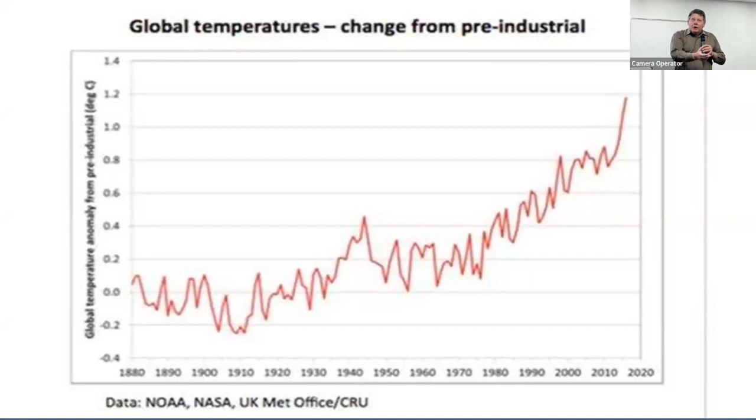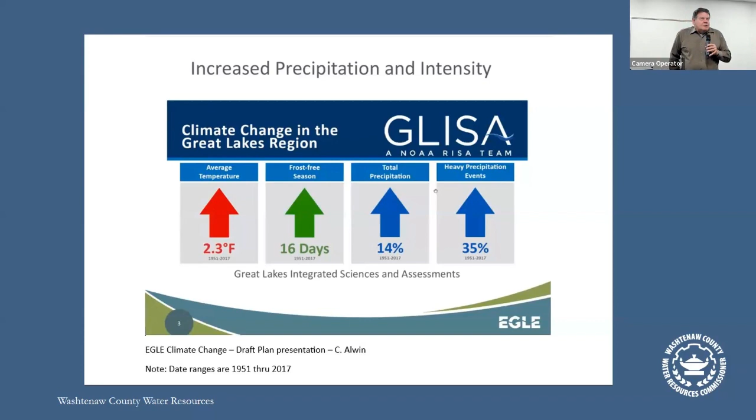So Jim, you can just keep it rolling. So the Great Lakes is studied a lot. For climate change in the Great Lakes region, there's a 4-college group that looks and studies and does forecasting on this. So again, 35% more rain in the period from '51 to 2017 in bigger storms. So anything that got stuck in the ground 30 years ago, 40 years ago, 60 years ago is under-designed at this point. That's not what things are designed for today.

So I'm going to talk about our strategy of dealing with more rain. We dig big holes, we dig site-specific holes, and we have a lot of people who help us out with green infrastructure. Those are very small holes.

So go ahead. On the regional storage side of things, in 1968, there was a very big flood in Ann Arbor. A cell parked around this area in Livingston for a good week. It rained really hard. There was a lot of flooding in 1968. Two dams were knocked out, Argo and Superior. Two other dams that the City of Ann Arbor owns were damaged. Lots of problems in the area. Lots of studies resulted in many.

So our goal is to store water during storms. It's raining harder and harder. It hits the neighborhoods. We want to capture that water before it gets to the bottom of the hill, because people at the bottom of the hill are going to be negatively impacted, as we've seen lately. You can go ahead and advance it.

So here's one example of a regional storm basin back behind the High Cone area. There's a large area called Doyle Park or Mary Beth Doyle Park. My office owns the land, and we lease it to the city for $1 a year or something like that for a nice big park.

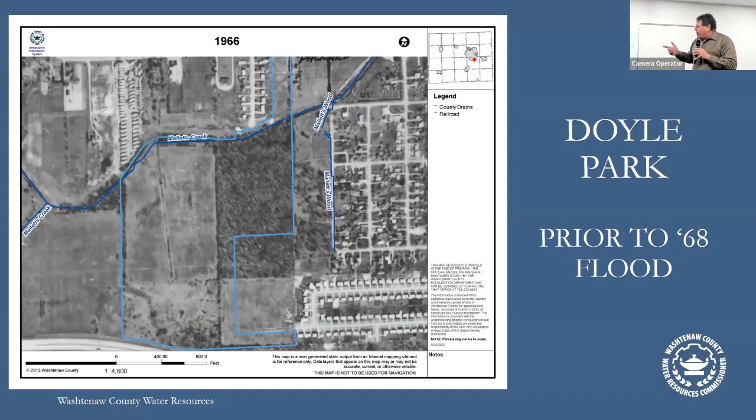This was an area that was cited. This is 1968, '66 aerial prior to the flood. So next slide, Jim. They built a storage basin. Pretty solid state, doesn't do much in smaller storms. So one of our strategies is we're trying to retrofit all of these basins so they can do more work

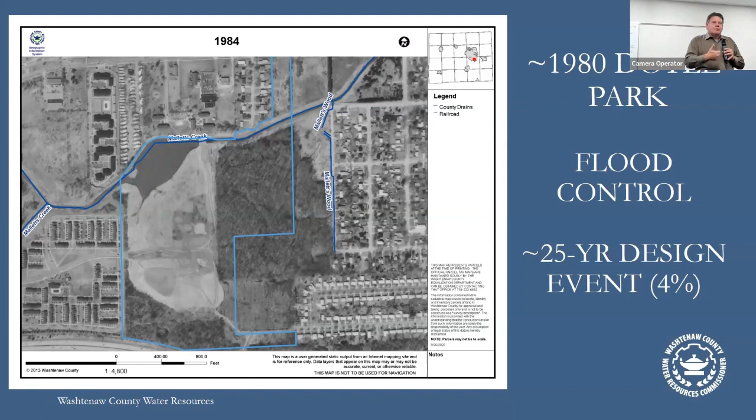for us. If you look at an aerial image of these developed areas, you quickly see the only place to provide storage is either schools or parks. They're the only places with a lot of green space. Maybe churches have a little bit of green space too, but it's not a use that fits. So this is what we have today. We've retrofitted it so the water will take the long way, if you will.

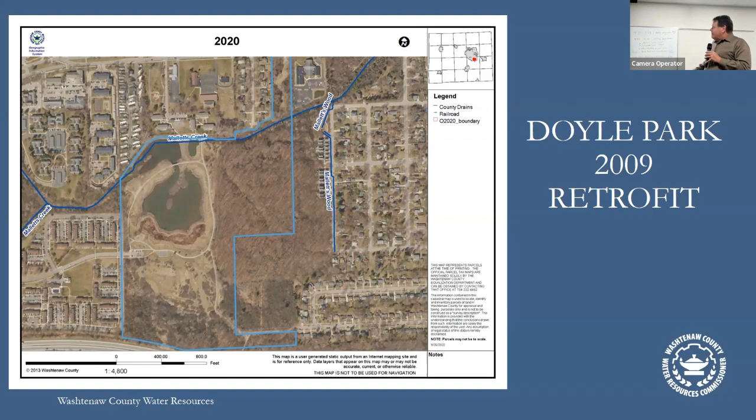This is Malletts Creek right here. In normal times, the water takes the long way around. Sediment settles out. We've doubled the amount of phosphorus we collect. Phosphorus is what causes these harmful algae blooms. That means you can't drink water. So you can just go ahead and advance it. I don't need to elaborate too much. This does more work than it used to, and you can co-locate it with a park.

So another place we did it, we have residential neighborhoods. Today, when residential neighborhoods are built, really since the 70s in the Ann Arbor area, partly as a result of that flood, every development of any substance that gets built needs to dig a hole to store water. And there's requirements for how big that should be and how often it should get flooded out.

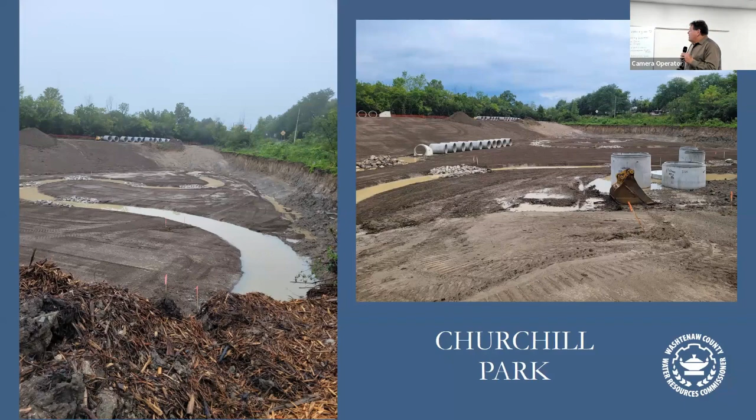And there's a creek that winds through there. We've made the creek a little more sinusoidal, a little bit better habitat. It looks a lot nicer if you go out there now. All the plantings have come up and we're going to continue planting shrubs and trees over time. So that's what we can do in neighborhoods to provide flooding relief. There's additional work proposed in that area as well.

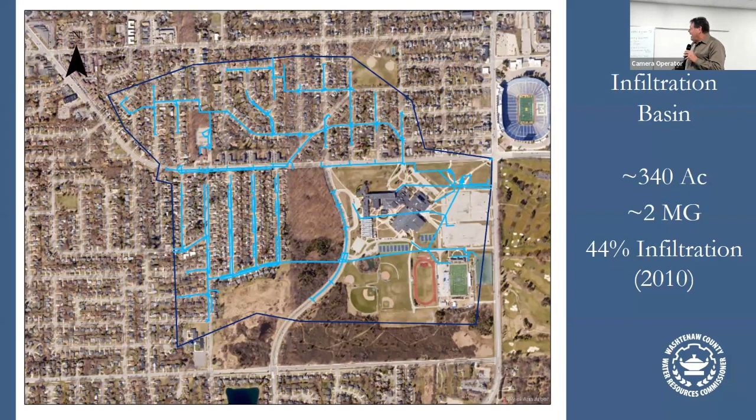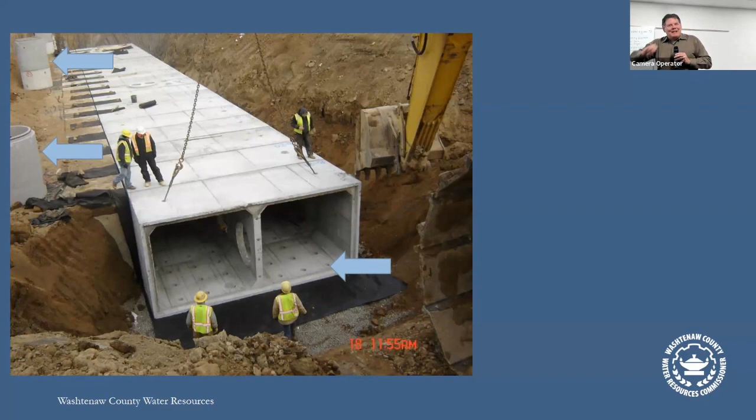And if we can hold up water even just for a half a day, when it rains really hard in an urbanized area, that water is going to show up at the bottom of the hill after the rain that fell on the bottom of the hill goes away. So the idea is hold it up just for a half day, a day and a half, and then release it more slowly.

So right now, as a rule of thumb, in a developed area, you need 5 to 10% of that area doing your stormwater management work for you if you want to handle what's called the 100-year storm. Little tangent, there's really no such thing as a storm that only happens every 100 years.

That's just an oversimplified way of saying statistically, somebody's done math that I can't understand to say there's a 1% chance in any given year that we'll get this amount of rainfall. So around here, that number is 5.1 inches, has got a 1% chance. That stuff's out of date. I don't know enough about the math, but I know what I see.

And we've had 3 events in the last 5 years that are bigger than what they say is maybe a 0.5% or less chance of occurring in a given year. So I don't know the right answer, but I know we need to provide more storage and capacity. So again, we're doing large basins and we're maybe getting about 10% of the issue dealt with in these large storage basins. So on site is the best way to do it. So we're going to talk site specific.

There's about 30 little ponds for developments. When I say little, some of them are a couple of acres. Some of them are a dry area where water just soaks into the ground. But this is the area around State Street going north-south, the State Street interchange. These are some legs of Malletts Creek. So you sort of get an idea of this area, pretty developed and newer development.

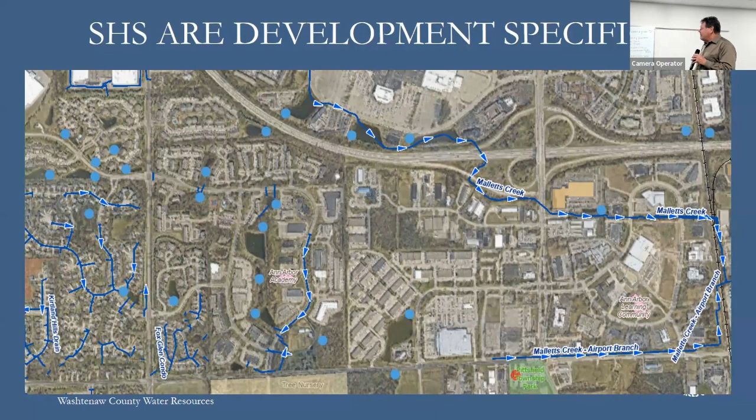All right. Jim's a steward for us. We count on volunteers a lot. As I mentioned, we do special assessment work, and for a lot of maintenance of these areas that are more and more naturalized, because the natural environment does a great job of dealing with water, it really helps us to have volunteer stewards.

So site specific, there's basically 3 situations in a development. Either there's no basin because it predated things, like I was showing in that example where we did a regional. There might be an old basin that wasn't doing as much work in smaller storms and was also designed for what people thought rainfall was at the time, and we know it's more now.

And then we've got new rules we established in 2014 that require people to soak water into the ground, 90% of the annual rainfall, unless they can demonstrate to us there really isn't any way to soak the water into the ground. If they can't soak water into the ground for a new development, we have them bump up 20% from what the calculations tell us.

I know the storms are getting bigger. It's really hard to predict how much bigger, but we've told the development community since 2014, and we worked with them as stakeholders, you're just going to have to bump things up if you can't soak it into the ground. So those site-specific things are maybe doing 3, 4, 5 times as much work as those large regional basins. A lot of people think, oh, if we build a big thing, that'll solve the problem. But again, water is something that's dealt with at the source.

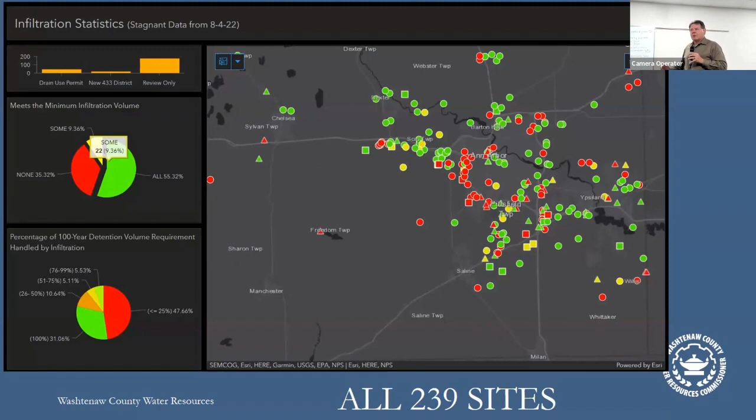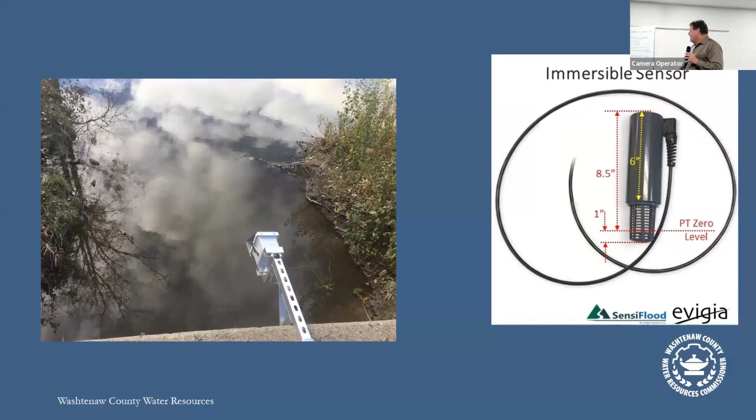We use sensors to figure out what's going on. We're actually doing a study now to take a look at our basins that are currently in the ground, functioning as they were designed. Are they storing as much water as they can? But more importantly, where could we store more water? We're trying to figure out how to retrofit, how to get a little bit more, squeeze that turnip. So we use sensors with U of M to figure that stuff out.

Just keep plugging away, Jim.

So there's also green infrastructure, people's homes. We have a lot of master rain gardeners. I've got a card out on the table with just some basic information. The next training course will be coming up here in January, February. So there's 1,800 rain gardens throughout the county. They're very small. They don't do a whole lot, but many hands make light work, right?

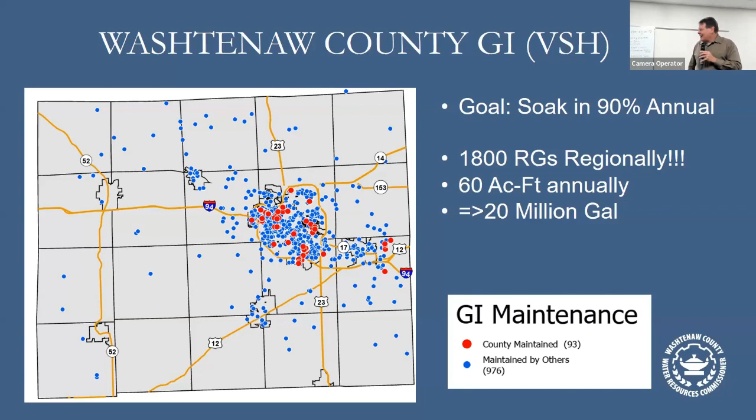So Veterans Park, right next to the ice arena there. Nice big rain garden that has been doing a lot of work and has grown in nicely. And then the next example, Stone School Road along the top. The ditch is very deep there, 3 or 4 feet deep. So we can have bigger plantings that are doing more work for us and helping out in Malletts Creek.

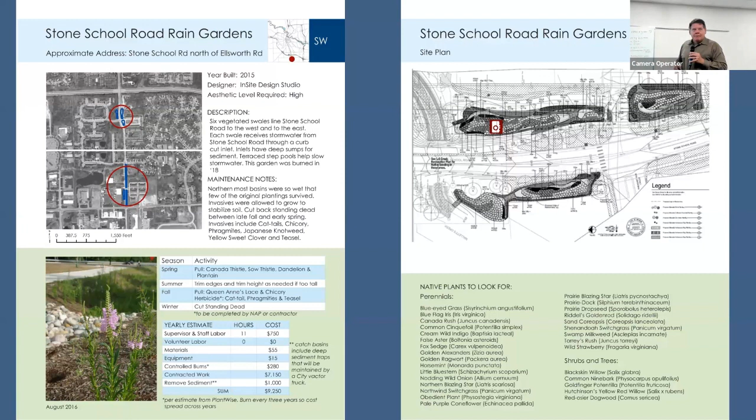We have a little cut sheet, so our volunteers have a pretty good idea of what's the original intent. What type of plants are we looking to keep? And we actually will provide people with a photo guide, like you see in the bottom left, of like, don't pull this, pull these other weeds. So these are fun volunteer work days that I like to go see.

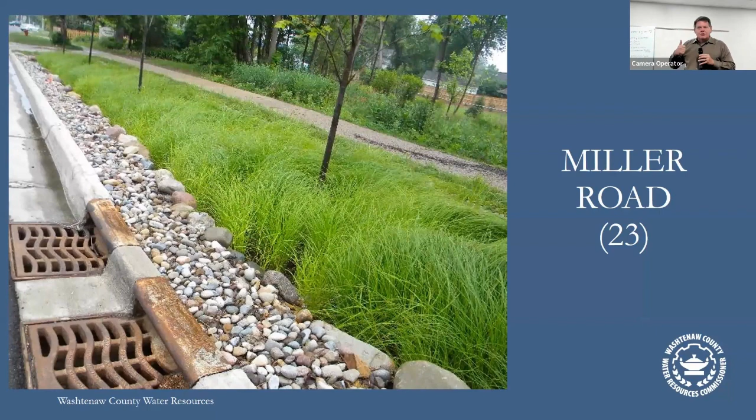And this is more the residential scale. So that's not huge, but that's dealing with the water from this home's roof. Soak that into the ground and we're all better off. Miller Road, there's 23 rain gardens. This one is very simple. That's called a fox sedge. There's just one kind of plant, 4 maple trees, and it's easy. And there's a lot of underground storage.

All of these streets in Ann Arbor and Ypsilanti have some sort of soak the water into the ground, because streets typically were not built to provide any stormwater management other than push it down the way. So in Ann Arbor, they realized we could do this underground. The whole downtown is a big sand sea. So these are areas where we've worked with road agencies to get more out of the public right-of-way.